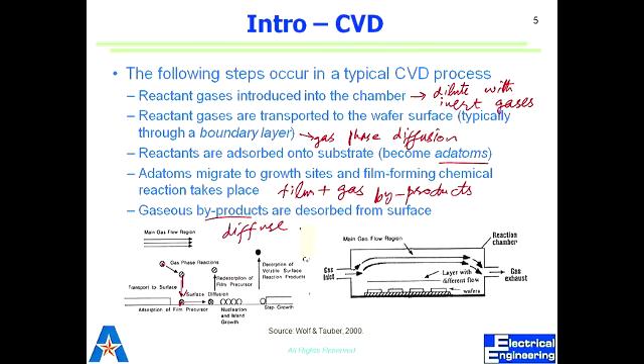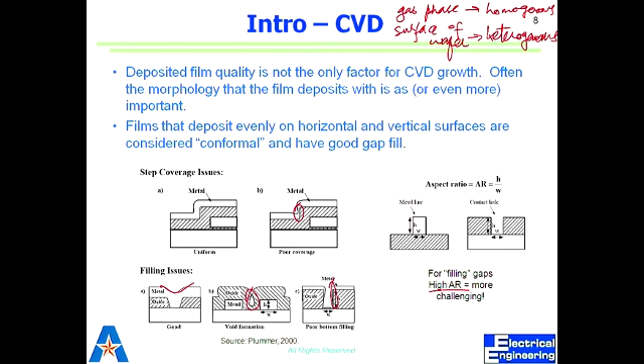So we looked at what happens in a typical CVD process, what are common reactions, and what are the different qualities of film that we desire. So one is conformality. We are looking at the Grove growth model where now we have 2 factors, which we call F1 and F2. One is flux, which is just the mass flow, and the other flux is what we call the chemical surface reaction, which is dependent on Ks. So for steady state condition, we say, okay, as much as we provide gets used up, which would mean F1 equals F2.

But it's not always the case. We may be providing more, but the reaction is not going fast enough. In that case, Hg would be a lot more than Ks. In the other case, we may be providing less than what the reaction wants. So the reaction is going fast, but we don't have enough of the reactants supplied in there. In that case, Ks would be much faster than Hg. So the mass transfer coefficient would be much less than the reaction rate constant.

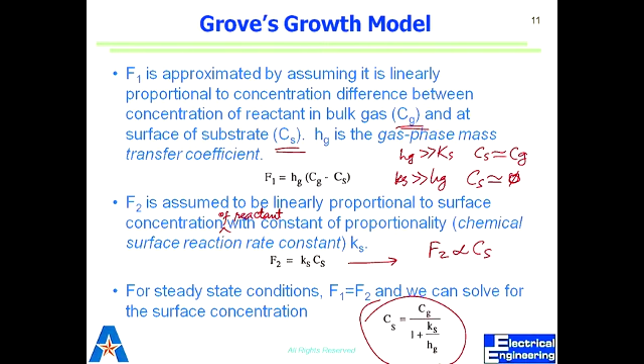And that ultimately will tie up into LPCVD and PECVD. In one case we have high temperature, in another case we have lower temperature. So both have different limitations. In a tube we have something we call plug flow. Plug flow is where reactants don't always travel in a plug form. They don't have a uniform boundary. So what we wish to have is this, but what we get is something like this. How would that translate into a reaction?

Non-uniform. Non-uniform, right? So that's the same thing for the oxidation furnace as well. What is our awareness on that? How do I make this concentration close to consistent on the surface of my wafer? Is plug flow the above or the below? Plug flow is above, where it travels. That's what we want, right? That's what ideally we want. What we get is not that.

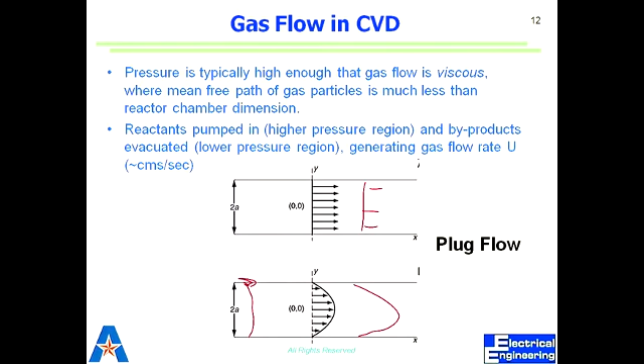So we have a gas flow rate which is different at different places, and what that results into is non-uniformity, right? There are models for how we get rid of that, or how we cater for that part where there is drag, which causes the boundary concentrations to be different. So as long as we are in this region, we don't have a concentration gradient, and we call it laminar flow. Right? How do we create those?

So the idea is that if we have a low Reynolds number, we can have a better flow where the boundary condition doesn't matter. So we want this to be a small number, right? So the small Reynolds number gives us a laminar flow. It's too much information, but the only key point to understand here is that Reynolds number defines the flow property.

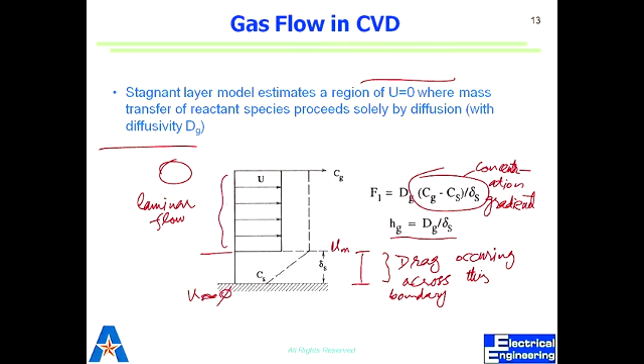So what do we actually do to achieve this? Different things. We can either have this platform at an angle facing the flow. Right. We can have multiple wafers placed and the master wafer placed after a few wafers. By that time the flow becomes very consistent. So there is a pattern to the flow of gas which becomes consistent after a few wafers.

Would you get this in oxidation also? Yeah. My first wafer was completely non-uniform, and the rest very, very uniform. The first and last few wafers are very non-uniform. As you get to the center, the gas flow is much more consistent. It's still not laminar, but at least it's consistent because there is now a pattern to the flow of gas. So forget about the much more detail which we would have gone through, but the bottom line is that we want a laminar flow versus a turbulent flow to get consistent gas.

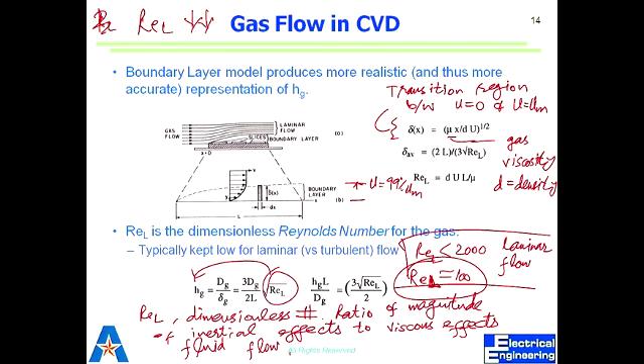For those cases where we have the substrates lying on the surface, just to get a laminar flow on every substrate, we now have the issue of the thermal gradient, something like you guys had discussed in a couple of your papers. The thermal gradient is you have heat being applied from here and your gas flowing here. So as you go from bottom to top, your temperature is changing, your velocity is changing, your reactant concentration is changing. Right? So as you go down, it's decreasing. You go this way, it's decreasing. Similarly, temperature is more towards the bottom, and temperature is more towards the end of the flow because by that time the gas has heated up.

So when we look at a tube, you have to think of it in 3 dimensions. You have to think of the heat that is coming from the bottom or maybe from all sides. So there is a gradient for the heat temperature. There's this gas which is flowing, which is colder when it enters, which is much warmer when it exits. Right? Where do you place your wafers?

It's going to be very different if you have your wafer at this place than if you have your wafer at this place. Does it make sense? So what we do is we find the sweet spot. In the furnace, we have to find or characterize the film growth properties by doing our experiments.

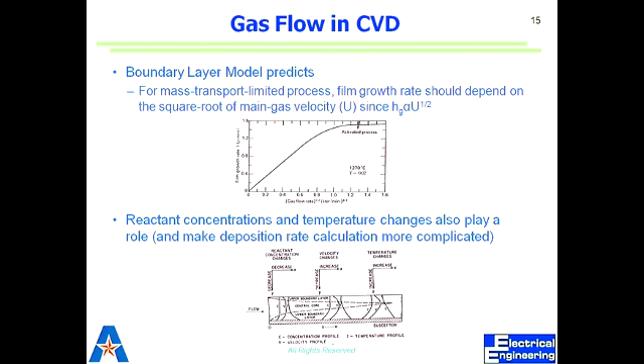So all those things will be similar in that case as well. But in terms of tube, the gas is flowing from one side. But in PECVD, you might have different arrangements. You might have gas coming from the top. You might have gas coming from the bottom. We'll see different configurations of PECVD gas. So we need to know where we place our wafer and what we get out of it.

The products are bad. If you want to deposit polysilicon, we use silane. Silane is a very toxic gas. It's the same there. The things which come out are also not good. Toxic, pyrophoric, corrosive, they start burning when they come in the air. That's pyrophoric. Hygroscopic is when it gets in contact with vapor, water vapor.

So what we have to do is know exactly how much is going in and exactly how much is coming out. That tells us, number one, how much is getting used up, and tells us when the reaction slows down, because then the concentration of the gases which come out may change as well. Right? So we have to know how much is coming out. What we do, we use MFCs, mass flow controllers, which measure the amount of gases.

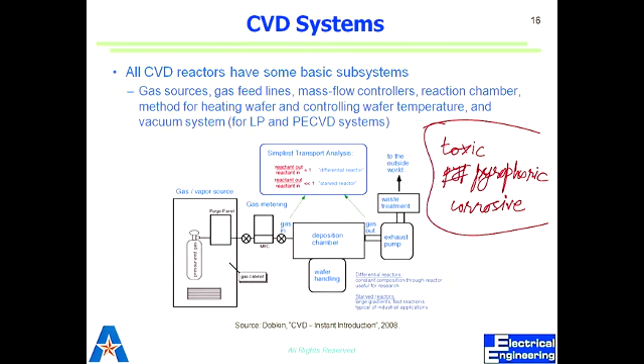No, sorry, MFCs for the gas, how much gas we supply. So what we have is a system where we inject the gas and we have the vapor diluted before it goes into the chamber. And that can be nitrogen gas, a noble gas, or maybe a reactant species like hydrogen. And we pump it into the system. So there are all these processes where we have mixing, we have vent, we have circuits that pump different gases at different concentrations to get the right mixture.

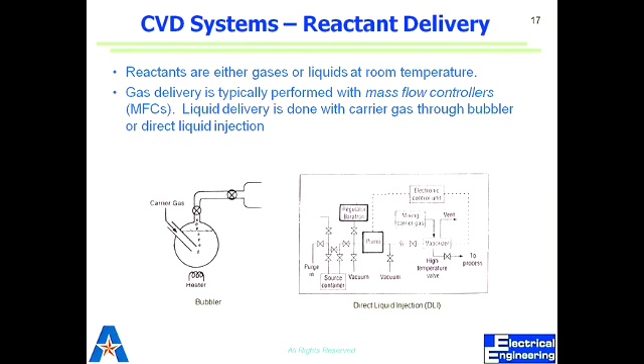So how do MFCs measure the flow? Now these are reactive species. For one, we cannot do in situ measurement because that will cause reaction, that will cause change in concentration. What does in situ mean? We can't put a probe inside the pipe. We can't probe the gas as they're flowing through. But what we do is we measure something called the change in temperature using a Wheatstone bridge.

Yes, I've heard of Wheatstone bridge before. Those who have never heard of Wheatstone bridge, it's basically a network of four resistances. So we have some reference. One is unknown. So the voltage drop across that tells us how much was the current flow or the resistance value. So what we do is we want to maintain exact flow.

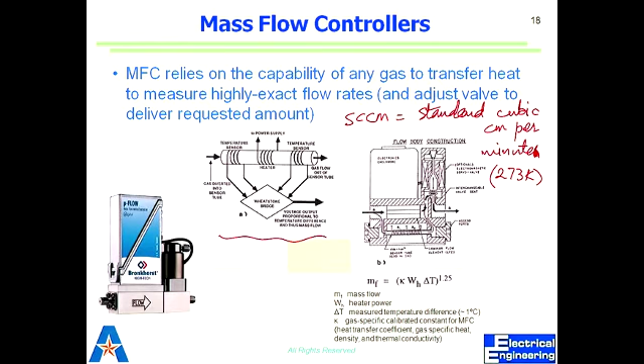In flow we define in terms of SCCM, which is standard cubic centimeter per minute. So as the gas flows through into the sensor, out of the sensor, we see the change in temperature after this heating, and that difference tells us how fast it is flowing, because when gases flow, they lose temperature. So when you know exactly how much you are heating it and you don't get that, that can tell us the amount of the gas that is passing through. So that's something that we use to adjust the flow.

So all processes use high temperature, and how high is what we use to define a hot wall or cold wall reaction chamber. Hot wall is where we have several substrates coming together, and we have much more range in temperature and pressure. Cold wall is where we don't heat it up, but we provide plasma to do the reaction. And by applying a bias on the substrate, we can make the species directionally get on the substrate. In which way we don't get contamination on the walls of the chamber.

And in case of hot wall, we get deposition everywhere. So there's much more gases that get consumed in that case. But in case of cold wall, we might have much more temperature gradient, resulting in much more variation in the thickness of the film that we get. And in this case, we get one substrate at a time. So a furnace, a tube would be a hot wall reactor, but a chamber would be a cold wall reactor, right? Where we create plasma.

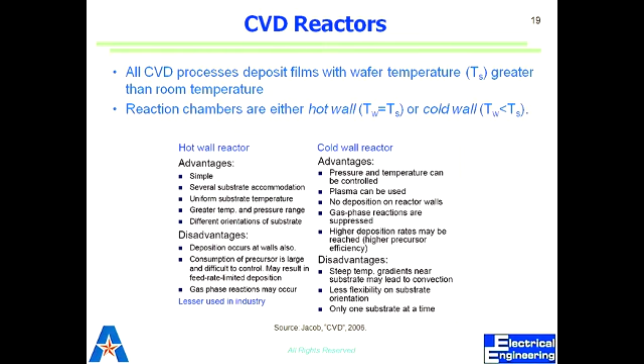So similarly, the LPCVD is what would be generally a hot wall reactor. A PECVD would be generally a cold wall reactor. And in PECVD, what we do is we heat up the carrier, the surface on which we place the wafers. We provide heat there. So when the plasma species get there, they get the heat for reaction, and they result in the formation of the film.

So these are the configurations for PECVD, where we might have gas coming from one side, we might have gas coming from the center of the chamber, maybe coming from the top with perforation, so to give it a more uniform distribution. You may have gas coming from the outside around a cylinder. We may have a single wafer treatment, and we may rotate the wafer for the process. In all those cases, we are dealing with those three factors: concentration of the gas, temperature gradient, and what was the third factor? Pressure, right? Because as they flow, the pressure drops. So these are simple configurations for PECVD reactors.

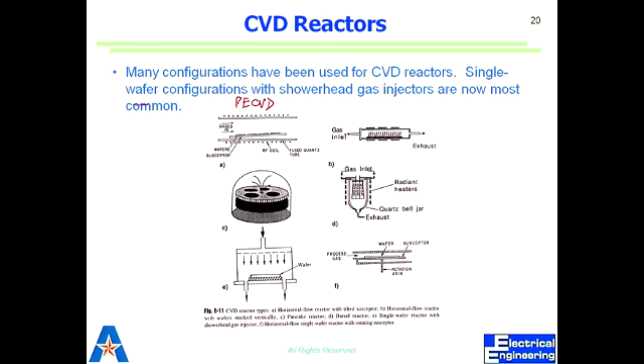Okay, this should have been before, because atmospheric pressure, LPCVD, PECVD, they all have different pressures and different temperatures. And we have seen these numbers that LPCVD has high temperature, and PECVD has low temperature, and atmospheric APCVD is a simple reactor which is at atmospheric pressure. In all those cases, we have different advantages and different disadvantages. LPCVD gives us excellent purity and uniformity, and gives you very conformal step coverage.

What is the only issue with LPCVD? A major issue? High temperature. Why is high temperature a problem? You destroy your device. It limits the kind of wafers that can go in, right? Because if we have metal, in many cases we do have metal, they cannot go in there. So it gives us all those good properties, but then at high temperature, what do we do then? And it's a low deposition rate, it takes longer to process. It takes a few hours to get to your desired thickness.

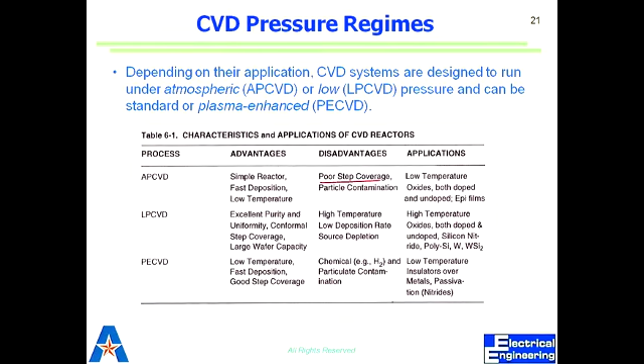PECVD is fast, gives you good step coverage, but it has much more contamination issues with it. So these are some applications: high temperature oxides, doped and undoped, silicon nitride, polysilicon. In this case, we put insulators over metals because now we would have metals already, and now we would want to put silicon dioxide. We use PECVD. So LPCVD and PECVD are more commonly used. So for your application, you'll have to see not only the kind of film you want, but also what you already have on the wafer. If we have gold, you probably cannot go LPCVD.

LPCVD is a reaction tube which gives us thin films of polysilicon, silicon dioxide, silicon nitride, and we can play with those recipes to get different doping, to get different tensile properties of the film. We can change the thickness as well as the mechanical properties of those films.

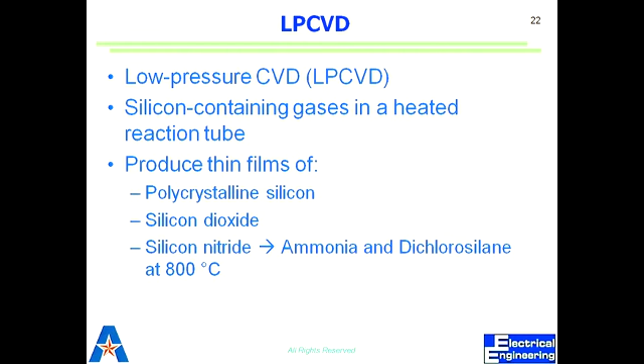In PECVD, we pump the gases in, we ionize them by using external power supply. This gives us higher deposition rate. We can control density, resistivity, etch rate, and mechanical properties of the film again. So it has low density films that we apply, which also means the etch rate is higher. When they are lower dense, they can be etched much faster than a film deposited by LPCVD.

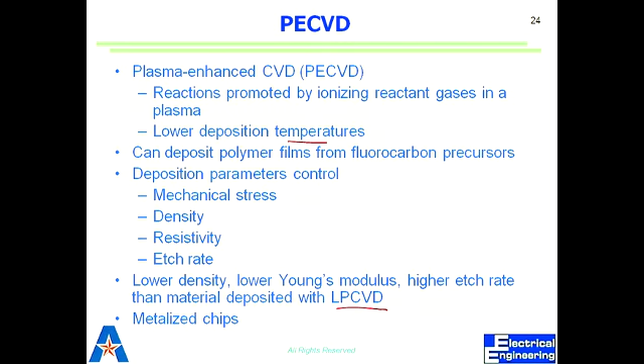So there is a limit on how hot you can go, right? What's the highest temperature you can take it to? So now in that recipe, you'll be bound to use those few.

So in PECVD, just like any power transfer system, we use a supply, which can be RF or microwave, and we transfer that into the reactant gas, into the chamber, and we can get a higher deposition rate at lower temperature. So our reaction rate constant is now getting energy. A reaction is getting energy from that plasma, not from the heat. So this can give us many different combinations of films by adjusting the plasma as well.

It gives you better step coverage because they can be used to etch back during deposition, so they give us improved step coverage. They have higher sticking coefficients because they are more reactive.

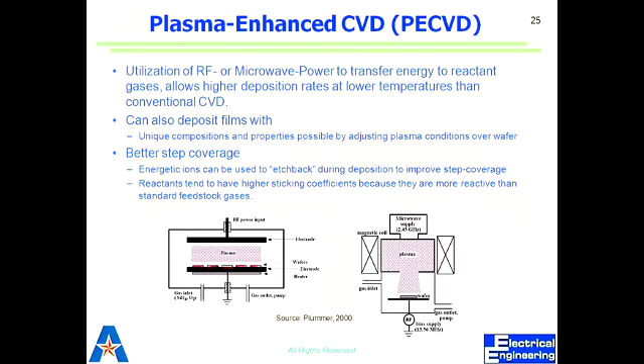So essentially we have the system where we create plasma, we have the wafers, and then we apply a bias. So the ionic species travel towards the wafers, right? They move under the electrostatic field towards the wafer. In the case of microwave, we have magnetic coils to give them direction to go towards the wafer. And we have to pump out the products during the reaction.

Again, density or stoichiometry is much less in the case of PECVD. There can be issues with contamination in the case of PECVD, which can result from the products that come out, hydrogen, nitrogen, getting incorporated back into the film. They can ultimately result in film degrading due to outgassing, cracking, changes in threshold voltages of the devices. Hot carrier effects. Hot carrier effects is when charge carriers push through an insulator, basically degrading MOSFETs and having much more inherent charge. So if you get those contamination species, they can cause electrical as well as mechanical issues with the devices.

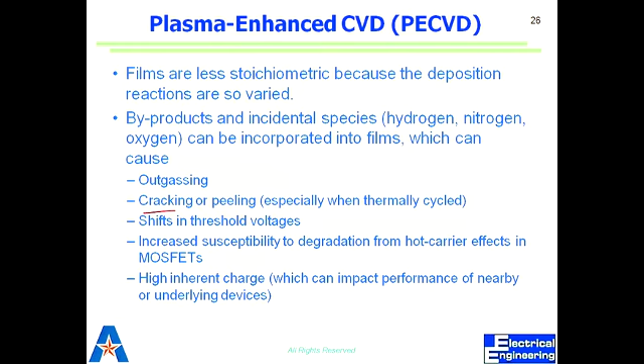This is an example of a batch tool where we can load a bunch of wafers. This is a mechanical arm which is taking wafers out of these cassettes and loading those wafers in those slots. And we can do a number of wafers in a given time. After the process, they can be taken out, put back, and another batch of 5 wafers goes into the process. So there are many, many different types of systems that do batch CVD.

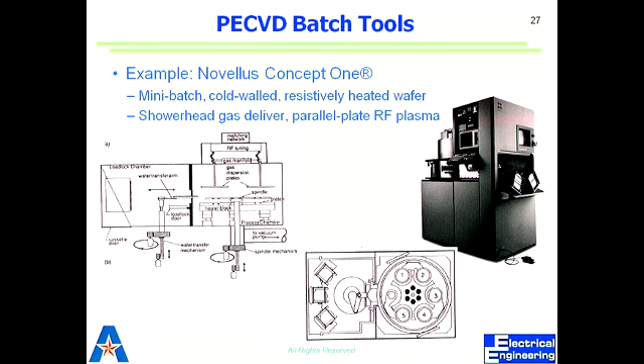In the case of PECVD, we use the same chamber to deposit different films. Why can we do that? Because in PECVD, there's no deposition in the chamber itself. Right? If the chamber is clean enough, we still have to clean, but there's no deposition of the material as such, because you have the field applied and your ionized gases, the products go only on the wafer on the way. That's not the case in LPCVD. So in LPCVD, we have to have dedicated chambers for the different materials that you want to use. Again, in this case, it takes a wafer from the cassette, loads it up, and does the process.

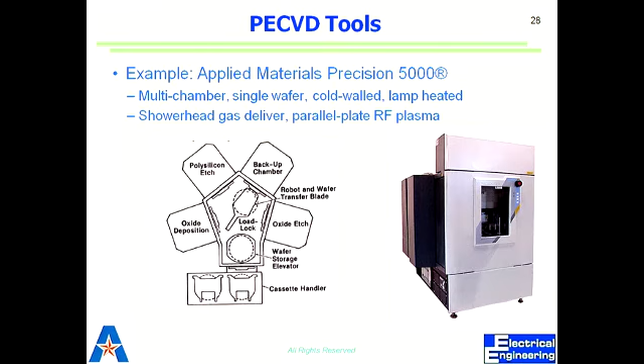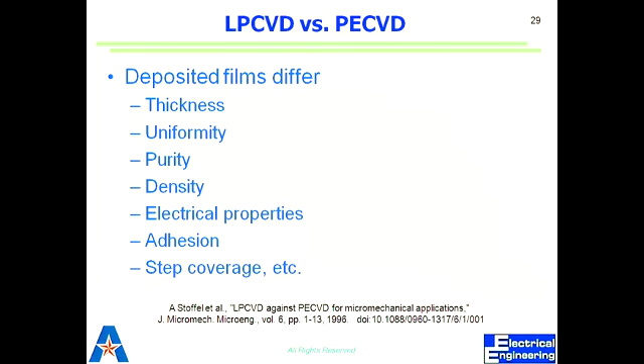There are many things different between LPCVD and PECVD. So thickness, uniformity, there's much more detail on that. But the factors we are concerned with are thickness, how quickly we can grow, how uniform the thickness is, how pure it is, how dense it is, which is stoichiometry, which will result in the etch rate being different. Electrically, how good are they in terms of insulating power? Right? How well do they adhere and can they cover steps?

So now these are examples to get the same thing but through different recipes. If you see, this is silicon nitride, but we can get silicon nitride through LPCVD as well as PECVD. In both cases, our temperature ranges are different, input gases are different, and we get different properties of the films. We get low stress, insulating. Polysilicon again has only LPCVD, but there we can dope it. We can have recipes where we can dope polysilicon. We can have amorphous silicon.

Silicon dioxide, many processes to do that, and much variation in the temperature to get there. Right? But their properties are different. Step coverage, etch rate, these all define how good a film we get. Now in this case, silicon dioxide, we are concerned about the optical properties as well. What should be the N, the constant for when we do ellipsometry? What is the factor when the polarization happens? Refractive index. Refractive index. So that is defined by N.

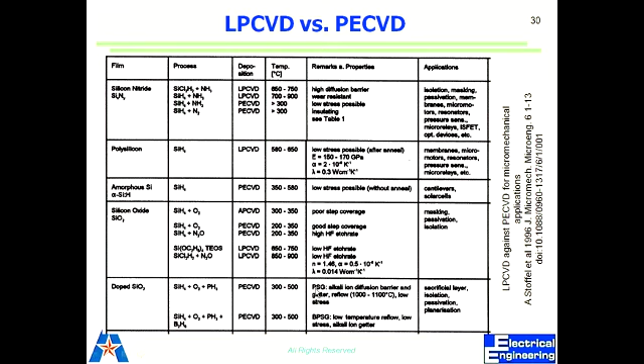And we need to know this to use the right value for the measurement of the thickness as well. So that can also be factored in. And what kind of film do we get from these different processes? We can dope silicon dioxide. This is glass, and we want to do it to reflow it to passivate all the devices. And we'll see probably next lecture why we want to do this.

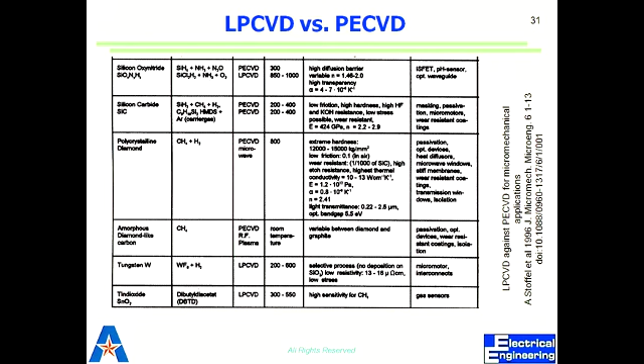Now, other variations: silicon carbide, diamond-like carbon, tungsten, tin dioxide. So these are other materials that I use. Don't get too excited looking at diamond, because these are very small crystals. You can't put them on your ring. These are films which have polycrystalline diamonds, very small crystals of diamonds.

Okay, now let's look at some of the examples that we get out of that. We get polysilicon. We use it for gate electrode, and for interconnect materials. If you want to use it as electrode, you have to heavily dope it. We do what we call in situ doping. We dope it while it's being deposited. Why do we want to use polysilicon rather than metal? Because simply silicon can withstand many more processes. It can go through high temperature processes. It has very good interface with silicon dioxide, right? So it can cover many different types of steps.

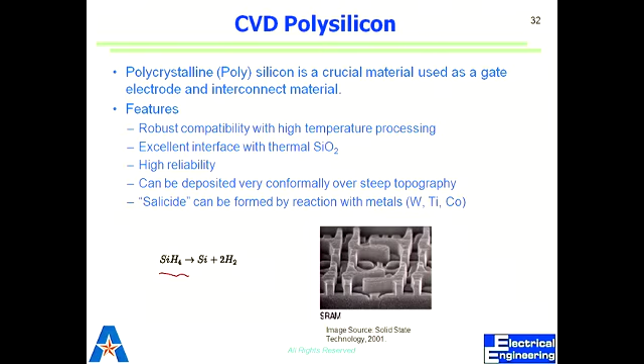And another interesting thing, we can make what you call silicides, which are the reaction of polysilicon with metals. So why do we want to do that? We'll see. They give us more sticking power. So when you make silicide, they can stick to other materials very easily. So you can react silicon to create another metallic material. What's an example of a silicide? Like what is the chemical formula? We'll see that. We'll see many of these, tungsten silicide and titanium silicide, later on.

Okay, how do different polysilicons vary? A simple example is doped and undoped. So we can see after heat treatment what happens to the film. The doped with heat treatment, what happens. Essentially these are grains, and it's like we discussed for deposition. When the deposition starts, we have small nucleation sites or small islands which grow and ultimately join each other. So these are all small grains which join each other and give you a film. That's what we call a grainy structure.

And since it's crystalline silicon, but every grain has its own crystalline structure, we call it polysilicon. It's not amorphous. You have small regions of crystalline material, but they're interfacing with each other. So their boundaries play a very important role. It's not just the crystalline property, now it's their boundaries which are also important. They would have many properties which are similar to single crystal silicon, but because of the grains, they have stresses, they have different resistivity than single crystalline silicon.

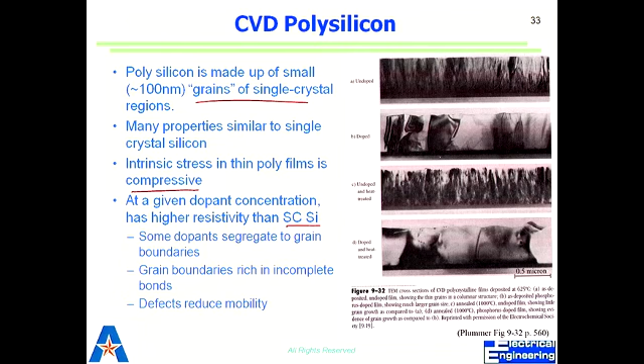So in etching, what do you use to etch silicon? Buffered oxide? Oh, that's right, sorry, not buffered oxide. Potassium hydroxide. So the etch rate is much faster with this because now you have so many grains to etch. Multi-directional etch gets rid of it very quickly. Grain boundaries add to the resistivity, for 2-3 reasons, so they reduce the overall mobility.

It can be doped during growth by adding arsine, phosphine, or diborane. Those gases give us different doping as we want. Depending on how much dopant we have with respect to silane, our deposition rate changes, because adding those gases can change the growth rate and the grain formation during deposition. Or we can do implantation afterwards to dope it.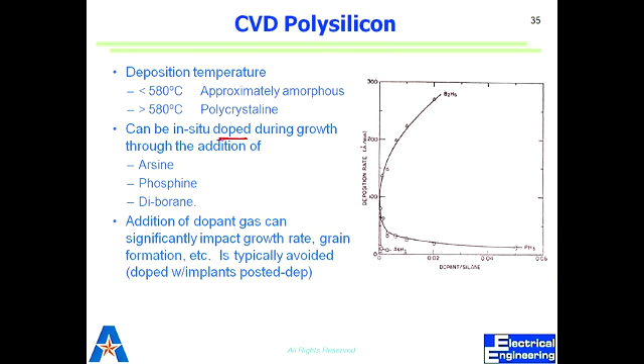This shows how it behaves for phosphine. As you increase the phosphine, your deposition rate goes down. But with diborane, your growth rate goes really high, so it can grow really fast. They have an impact on different parts of the grains. Generally the process is pyrolysis, which is thermal decomposition of silane at those high temperatures. Silane gets adsorbed on the surface, then breaks down, gives hydrogen away, and turns ultimately into solid silicon on the surface. Depending on your grain boundaries, we will have different densities of polysilicon. Highly dense would mean much more grain boundaries. Less dense will mean bigger grains.

So we dilute the silane to avoid its decomposition before it gets to the substrate. So the properties of the silicon depend on the properties of the silane, and on the temperature as well. Low temperature results in a smaller grain size.

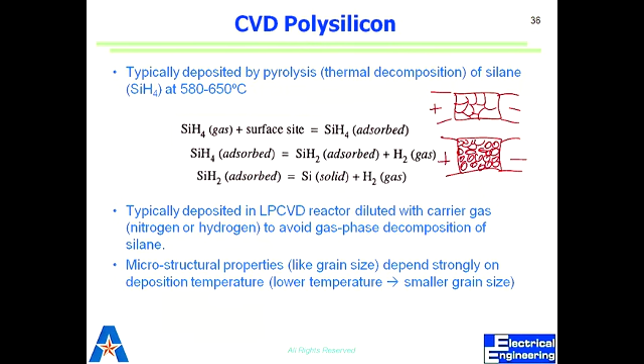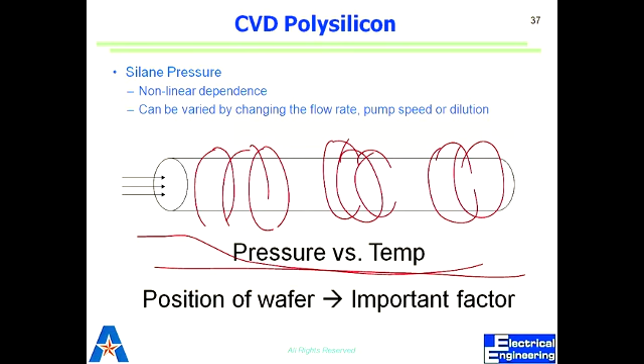So it's again the same idea that along the length of the tube, we have pressure, temperature, and the concentration of the gas, which changes. So we have to know at every step how that is going to change. The pressure is going to change non-linearly. And we can adjust it by changing the flow rate, the pump speed, or how diluted we have it in there. And so it's again diffusion, implantation, or in situ.

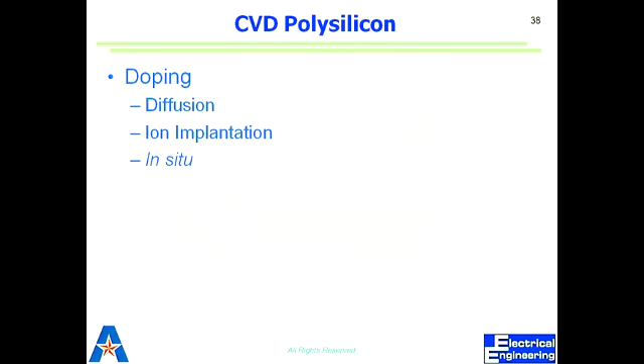There are different ways we can dope it. We can do silicon dioxide CVD as well. Different CVDs give us different properties. Okay, what was N? Refractive index, right? Which tells us how light would travel through that.

Of course, we know the uses. We are going to use it for gate oxide. We are going to use it for field oxide. We are going to use it to make trenches, to fill up trenches, to isolate two devices. We have what we call stacked gate, where we want multiple layers of gate oxide. We have to cover diffusion sources. We have to cover parts of a chip when we are doing a diffusion or ion implantation. We want to cap everything, cover everything, and we want to passivate everything. So all these uses are for CVD silicon dioxide.

So it can have different stoichiometry from thermal silicon dioxide, with low density, right? We discussed that it would have low density. And we do some post-deposition temperature processes which densify the silicon dioxide and give us back thermal-like properties by annealing, right? The silicon dioxide itself in thermal growth as well is amorphous, so we can anneal it and pack it much more to get close to there.

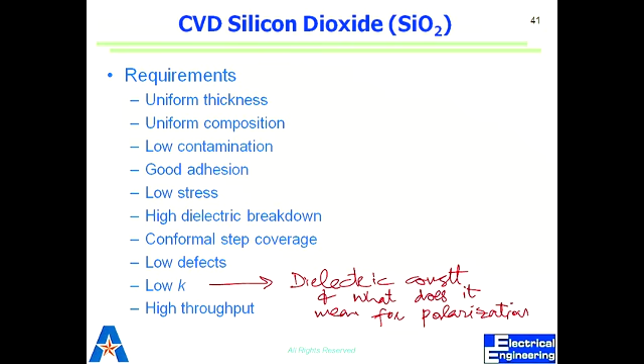So high K, or dielectric constant, defines the capability of a material to create dipoles, right? So we want a good amount of dipoles if we are using it as the insulator in a capacitor, not for devices. So here we want low K, but we have used high K to replace it, to have higher thickness, so mechanical problems are not there. That's a separate issue. But we want to maintain mechanical and electrical properties: index of refraction, etch rate, dielectric constant, and electric field breakdown.

So you wouldn't use CVD silicon dioxide as a gate oxide? We can do the post processing and bring it down. We can get it to more like thermal properties after annealing. But then we'll be increasing the K. We want high K for gate oxide, right? Yeah. So if you use CVD, it won't guarantee that the K will be good enough. K would be the same as silicon dioxide. How can you change K for a material? You can make high K materials with higher thickness.

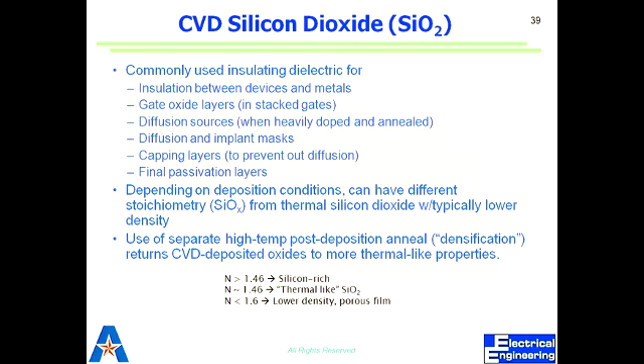But for silicon dioxide, you can't change it, right? But you can deposit it and bring it to the same electrical properties as a thermally grown oxide. The density is different, but you can anneal it and get it close to that thermally grown oxide. That's the whole idea, that we may not have enough silicon to get silicon dioxide. So that's why we do CVD. Of course, there will be trade-offs, but we can get much closer properties to thermally grown silicon dioxide.

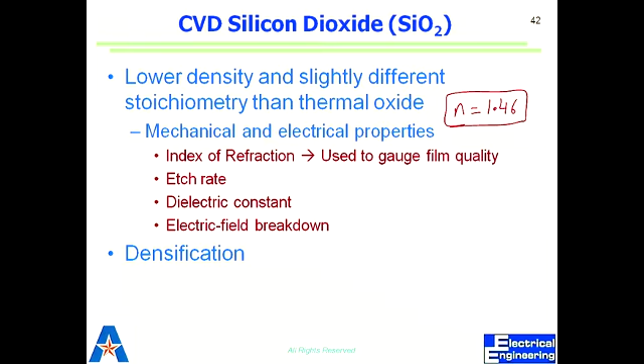For gate oxide, you would prefer that you grow the oxide then? Yeah, we want it to be not just thermally grown, we want it to be dry oxide, which is much finer quality, not wet oxide. This you always remember. When you talk about gate oxide, you will always be doing dry oxidation. We don't do CVD; we can do those for field oxide, but not for gate oxide. That has to be very high quality.

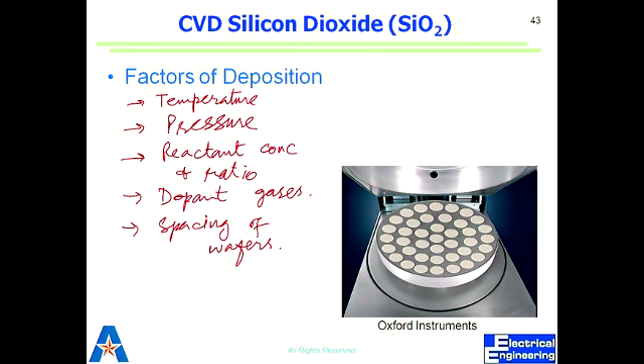So again, same things: temperature, pressure, reactant concentration and ratio of those, dopant gases, spacing of wafers. These all matter when we are doing CVD. So this is an example of PECVD where you have the substrate spread all over the chuck, and you close that chamber and create the plasma. The gas may come from the top or from the bottom, but the reaction happens at the surface and you get the deposition done. This is a reaction for silicon dioxide. You have silane reacting with oxygen resulting in silicon dioxide, which is solid and gets on the surface.

The other process is using phosphine, where you get phosphosilicate glass, PSG, which is a form of silicon dioxide, but it has phosphorus in there. This is also done by a process called TEOS. Tetraethyl orthosilicate, yeah, that's tetraethyl orthosilicate. So it's a process called TEOS. This guy is tetraethyl orthosilicate, which gives you silicon dioxide. This gives much better conformality on the surface. Conformality means better step coverage? Yeah, conformality is always step coverage.

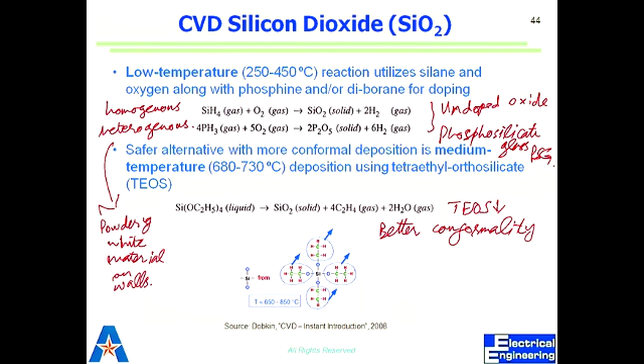Similarly, when we have TEOS and oxygen or plasma, or oxygen or ozone, this is O3 and O2. The change is much more with just oxygen than ozone. The oxygen in this case gives us a tensile to low compressive stress. So the oxide film will be under stress. How can we get rid of stress in a film? Anneal it. Heat it up and we get rid of much of the stress.

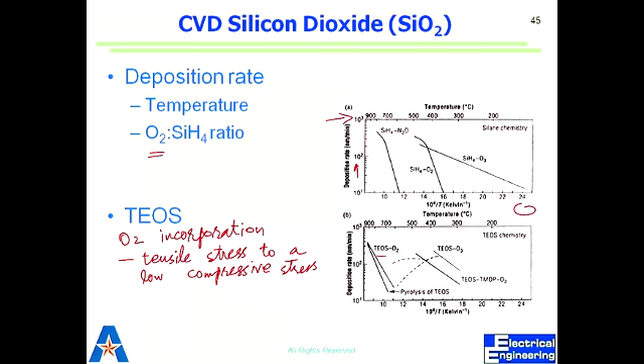So what does ozone do? This is basically showing that if you use ozone, with temperature increasing this way, you can get the same deposition rate at lower temperature. What does ozone have to do with that? What is typical of ozone? It's an oxidizer, an oxidation agent. It'll oxidize things. But what is special about ozone? It's aggressive. It's not stable. So it reacts much faster. Ozone is much less stable than oxygen, so we can get the same deposition done at lower temperature. This gives us high conformality and good gap fill, but at low temperature.

So this is an example of PECVD, where you are left with these things on top of these shaped materials. But in this case, on top of them, they are covering everything.

So it's poor gap fill with what is called bread loafing. You get this bread type of feature on top. In this case, you don't get that kind of feature. It gives you excellent conformality. Now, the disadvantage is that it has different deposition for different substrates. We don't want that. And because ozone is aggressive, it can react with water also and get incorporated into the film.

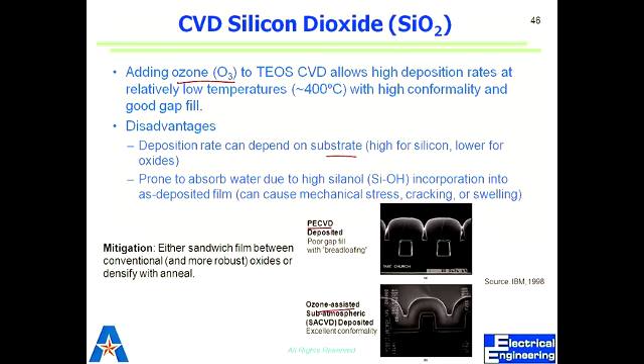PECVD of oxide can do it at lower temperature with decent filling of gaps. So in this case, instead of that bread loafing, we are getting full coverage and not getting any voids in the film on top of that. By using a combination of argon and oxygen with silane, we can achieve a bottom-up deposition where things first fill up at the bottom and then go upwards. Using argon results in removal of the material at some places and redeposition.

You must have seen this in deep RIE as well. You want to etch some species during deposition. That etching helps us because it takes away those thin projections which may ultimately become a problem. So it doesn't etch the whole bulk, but it etches those small projections. In this case, it would have taken care of any projection which might have come in this way, but not this actual filling. So some etching species are helpful in deposition because they would not let those projections grow rapidly.

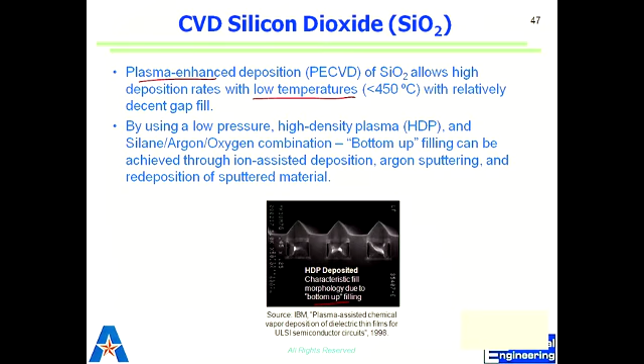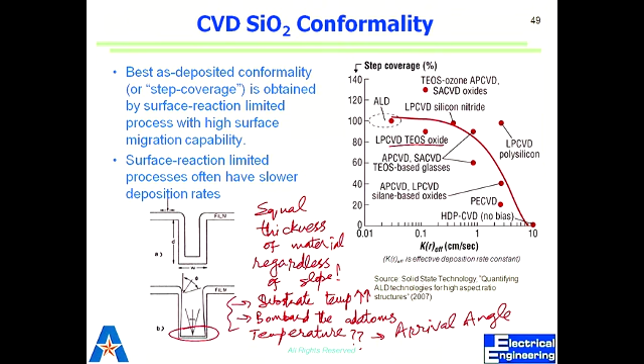This is something we do on oxide films as well. We reflow them. Then we'll see that when we get to planarization, how we achieve that. This is an example of a conformal deposition where the thickness, even at the step, is almost the same. So this shows a very good step coverage for the deposited material. It doesn't have pinholes. It's crack resistant. It covers all the variations.

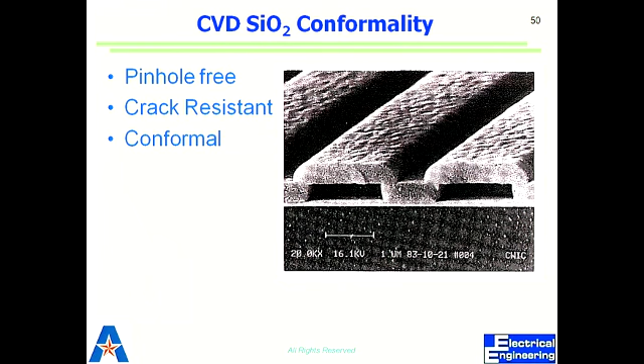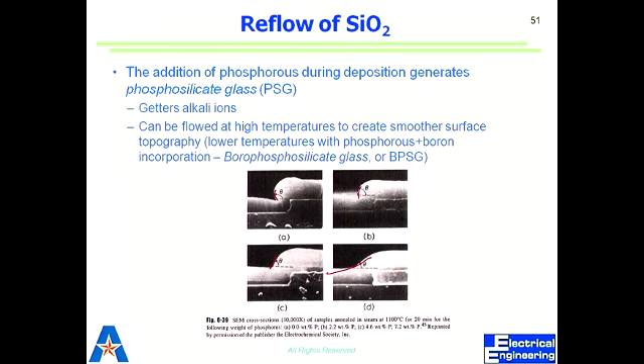So this is again an example of temperature versus the angle, how we can reduce that angle with exposure to high temperature. In all cases, we are reducing the angle down, and this is what we define as our angle. You see this is fairly high and we are getting it down.